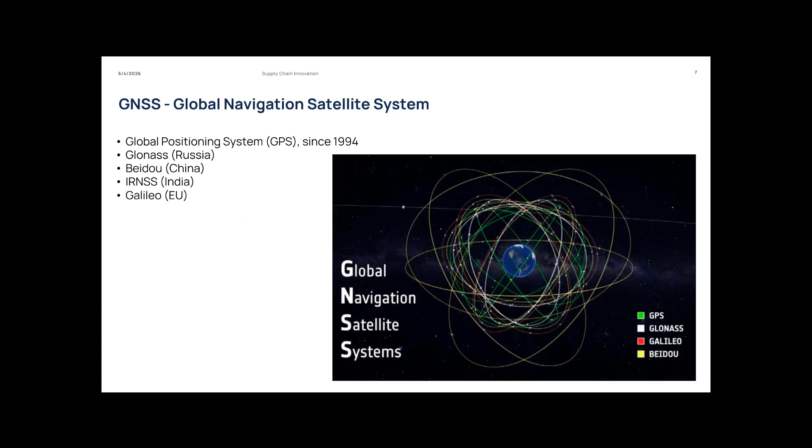So this means that out of all of these orbiting satellites, right now we need to get the signal of at least 4 of them. In a couple of slides we will see that we see many more, but that's the main minimum requirement for making GNSS work. So at least 4 satellites that are simultaneously visible from our side.

But the number of satellites in each constellation is much higher because we need to guarantee coverage all over the planet. The satellites that we see right now over Milan are different from the satellites that are visible right now over the United States or over China, because satellites are able to cover only a specific portion of the Earth at any time. And since the Earth and satellites are rotating, there is a continuous variation of which satellite is visible from which side of the Earth.

It seems easy, it's just a measure of when the signal arrives and when it was transmitted. In practice, there are a lot of issues. First of all is the propagation through the ionosphere and troposphere, which is not ideal at all, but that is related to wireless electromagnetic propagation, which is not in the scope of today. So we are not going into the details of the physics. You should have seen some of the principles of propagation in the physics courses in the first year of the bachelor, but that's not the point. It's just to mention that propagation in the atmosphere introduces possible errors.

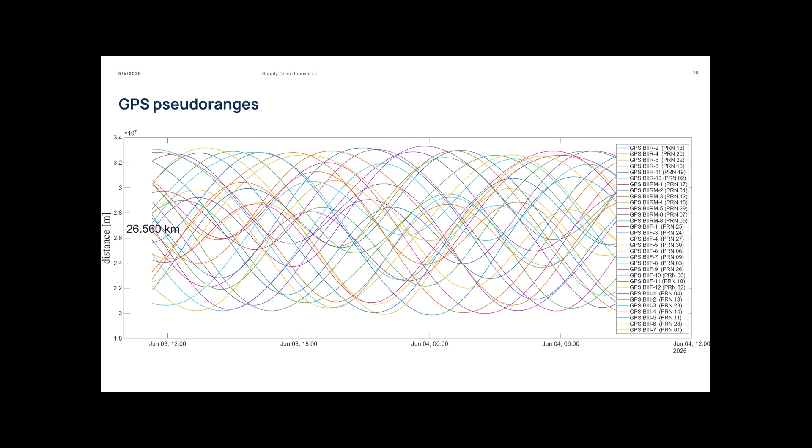Receiving at least 4 of these signals allows us to estimate the 3D position and basically see where we are on Google Maps or Apple Maps or whatever navigation app you are using. So the final use is actually very simple. We just see a circle or a pin on our smartphone, but that is the result of complex processing and wireless propagation phenomena that started 26,000 kilometers away from us.

If it is not range, it can be range difference. So it's no longer the distance, but the difference of distances. We have one distance as reference and another distance. So we take, for instance, sensor 1 as a reference, and we compute the difference with respect to sensors 2, 3, and 4. Now we do not have a circle anymore. We have a hyperbola, that's the geometrical interpretation of difference of distances. The user is located along this hyperbola, and intersecting the different hyperbolas provides the final user position.

The difference is that we need to use one reference. This means that if we have a sensor network of 4 sensors, we can only have 3 time difference measurements, while in the previous case, with 4 sensors, we have 4 time measurements. A drawback, but this difference of distances mathematically eliminates the clock difference between the device and the sensor. So it's a way to deal with inaccurate or non-perfectly synchronized devices. When the user device is not perfectly synchronized with the network, this type of measurement is used instead of the previous one.

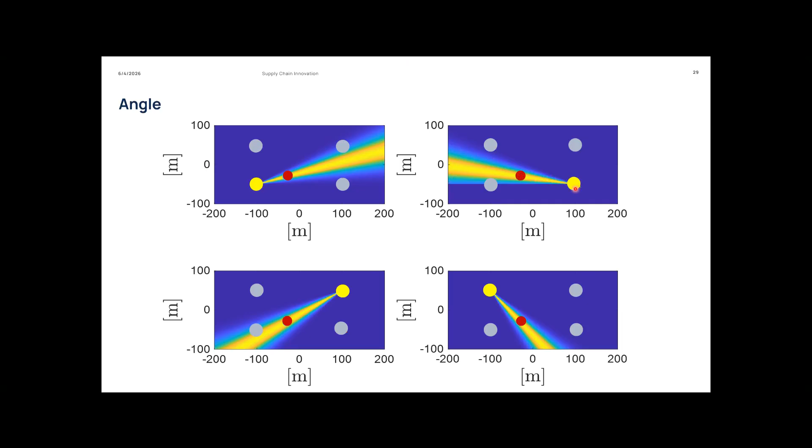Another type of measurement is the angle. So no longer a circle, but the angle is this cone of information with respect to each of these sensors. What is the property of this cone? It increases the uncertainty with increased distance. Look, for instance, here. The further we move away from this sensor, the greater the uncertainty. So the information is more accurate if the user is very close to the sensor. But overall, the process is always the same: measuring the angle from the four sensors of the infrastructure, intersecting, and getting the final estimate of our position.

The last type of measurement is instead power. Power is still producing circular-based information with respect to the sensor. The difference with respect to ranging is that in wireless propagation, power is logarithmically decreasing with the distance, so the accuracy of this information is worse than traditional ranging information. But still, the concept is measuring the power with multiple sensor infrastructure and then intersecting them to get the final position, even if the accuracy with power-only based methods is not always good at all.

So here we easily have tens of meters of error because we are not able to get an exact power measurement. And this is why typically power-based information is mainly used not for absolute X and Y positioning, but mainly for proximity positioning. Proximity means you assume or you tell that the device is in the area of one sensor rather than specifying exactly its coordinates.

So if this device is connected or is receiving the highest power from this sensor, it is said to be in its proximity and it is located in a specific coverage area. So if this sensor has, I don't know, an area of 100 meters, this device is in a circle of 100 meters, no matter where exactly it is. We know that it is connected with this, so it is, of course, in its coverage area of 100 meters.

Having seen the different technicalities or the different ways of positioning measurements, let's now see the evaluation. So imagine you have your network of sensors. How do we understand or how do we measure the quality or the accuracy, or how does it perform? The metrics are not only used for evaluation, but also for design. So choosing the trade-off of installation, how many sensors, where to install, how to connect, which measurements they provide, etc., is also a design choice.

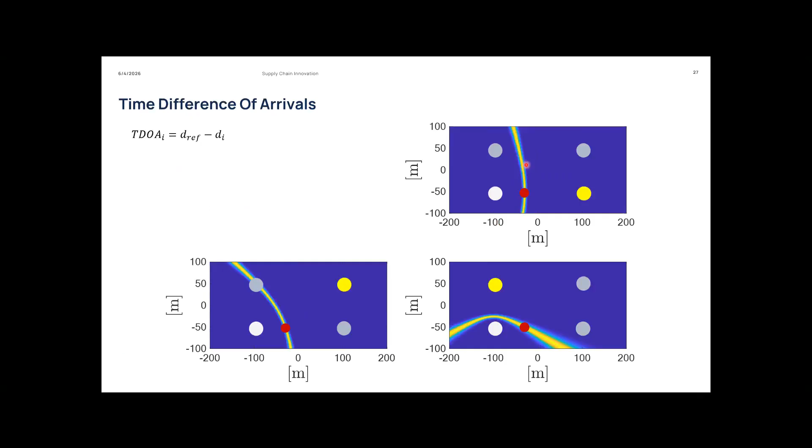So imagine this architecture here: the more devices you add, the more processing load is requested by this processing unit. And there is obviously a maximum tolerable number of devices such that you do not saturate the processing, or you provide a final position estimate in due time. In due time means within a specific maximum latency threshold.

Another metric is the accuracy: how close the estimate is to the real location. And precision: how much is the system able to replicate the same result in the same condition? Complexity: the degree of hardware, software, and operating factors of the full localization solution. The robustness: the constant system-level accuracy over time. The system must be able to continuously provide positioning estimates in a reliable and accurate way, even if the technology becomes outdated or the hardware is aging. The reliability: the percentage of valid positioning results.

We need to deal with energy efficiency. So understanding which are the best sensors, if they have to be connected with a wire to the electricity, or if we can use a battery. In the case of battery-based sensors, the energy consumption is strongly related to how many months or years the system can be deployed without intervention to replace the battery. And the trade-off between how often we provide measurements and how long we would like the battery to survive is the trade-off for battery-based systems.

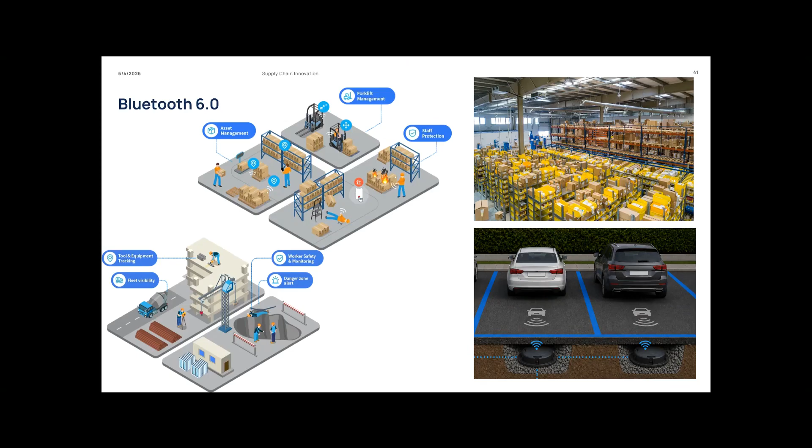Another technology is RFID, radio frequency identification, which can be an active or a passive technology. Passive technology is basically our credit card system. So you do not have a battery in the credit card, but you just have a passive electromagnetic intelligent chip on your card that is sending, reflecting information towards the reader, the shop. Or we can have active RFID systems like the one we use for paying the highway in Italy. And in that case, the devices have a battery.

Basically this type of technology acts with the sensor, so our infrastructure that sends a query signal. The RFID chip replies. So a query-receive mechanism. So in case of a credit card, this is our paying device at the shop, and the receiver is instead the credit card that prepares the signal. In case of the tolling system, it is a device on the tolling gate, and instead our Telepass equivalent solution.

This is a technology that is extremely accurate. This is an example of a test I did for different companies showing that overall we can have centimeter level of accuracy. But the drawback is that the devices that constitute the sensing infrastructure have a limited coverage, typically not going beyond 50 meters.

In some cases, if there is no obstacle in between, you can go up to hundreds, but in practical conditions it's 50 meters of coverage, so it's very limited coverage, which means a lot of installation. So in order to monitor an area, there is a lot of manual intervention and maintenance to do for installing and keeping the system operative. But overall, once you install the system, you get super accurate performance.

Even if we are in a complex industrial environment, where you see there are lots of metallic objects. As I said at the beginning, objects produce reflection, shadowing, and if they are metallic, they completely block the signal. So the industrial environment is the worst environment for positioning because of the metallic presence and machines.

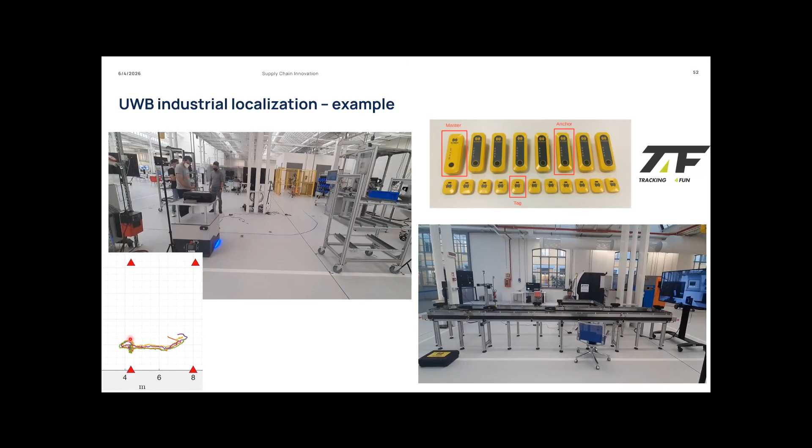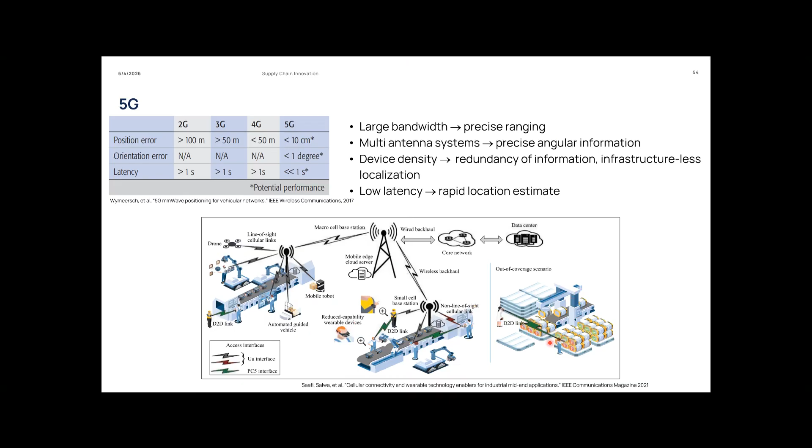So the concept of Wi-Fi is definitely equivalent to the 5G. Both of them are comparable, from an operational point of view, technologies for joint communication, which is the first primary use case, and positioning.

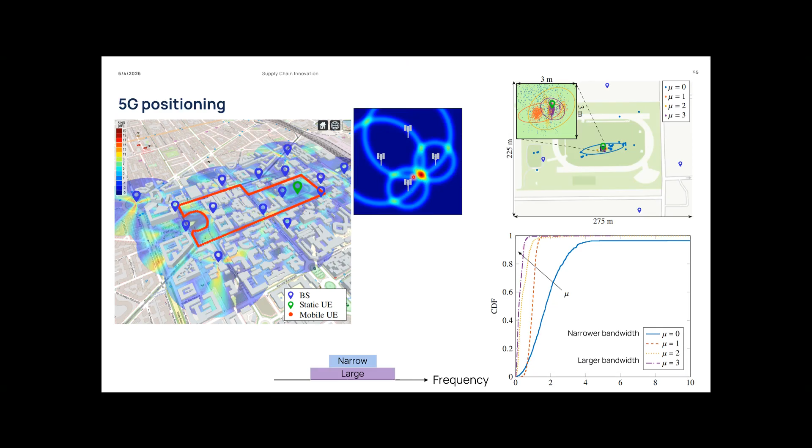And 5G also has implications in industry. So in a smart connected industry, you can have 5G connectivity and positioning service in different contexts, different applications, different use cases with different KPIs, but still all addressable. Healthcare, so in hospitals, the navigation of drones, in retail stores for in-store navigation, but also for personalized offers, etc.

So overall, you see that use cases are always the same. Use cases that can be addressed by RFID, Bluetooth, Wi-Fi are more or less the same, but they are addressed with different technologies. And this is exactly, I would say, one technology that fits all. So 5G can be a super competitor with respect to all the other technologies we have seen so far, because it can address all of the use cases, while also guaranteeing the same accuracies, at least theoretically.

The only difference is that the others are already mature, they are already commercially available. 5G is not yet commercially available, but it is expected to address the positioning concept, benefiting from what? Benefiting from almost worldwide coverage, because cellular connectivity is available almost everywhere, or it's going to be. And it's like repurposing it.

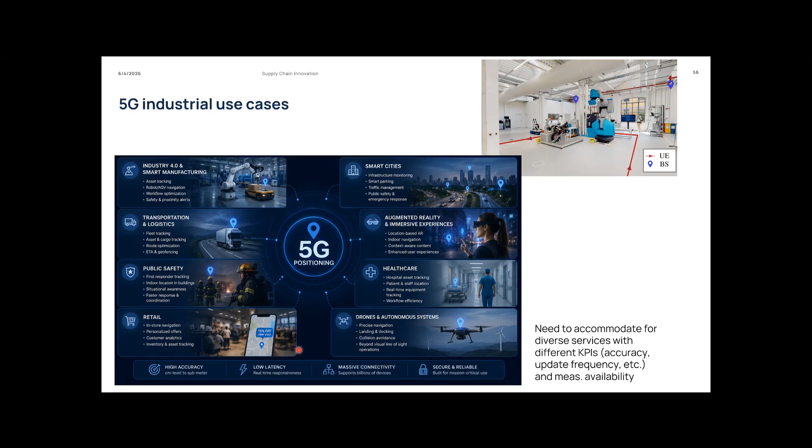So while Bluetooth sensor networks or ultra-wideband sensor networks require specific installation, 5G can exploit cellular operators' infrastructure that is already installed. Then, okay, if you need a specific 5G service inside your house, you have to install specific base stations there. But overall, at least for a consumer positioning service, everything comes in a passive way, just like GPS, more or less.

Let's now move completely to passive technology, which is radar, radio detection and ranging. It is a system that sends electromagnetic signals and listens to the echoes reflected back by the targets. Any object has a specific response to radio frequency impulses. Metallic objects have higher reflectivity, the human body has much lower reflectivity, but overall, objects reflect the signals. This is why we have multipath, it's exactly the same concept.

The difference is that here the copies of the received signals are measured by the same device that transmitted in the case of a monostatic system, while if the reflections are measured by another receiver, it's a bistatic system. But overall, the system measures this two-way signal reflection, from the transmitter to the object and from the object to the receiver, and estimates its location by measuring the distance and also the angle.

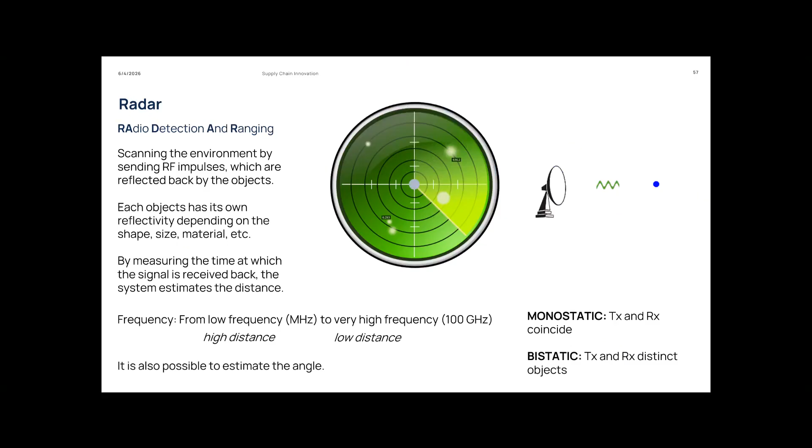A very similar technology is LiDAR, but the difference is it doesn't use radio frequency, but optical, so basically laser. So it's just a frequency shift, but the key technological problem is the same. So LiDAR and radar share the same physical concept. The only difference is that radar can somehow also penetrate objects while LiDAR cannot, because light doesn't pass through objects at all.

So the result is that we have a lot of obstructed areas. Look here, this is a LiDAR on this vehicle, and the vision that the vehicle has from all the reflections from the objects. But look what happens when the light arrives and bounces back from another vehicle. What's beyond the vehicle is completely obscured, so it is not possible to see this area at all, because the light cannot pass through the vehicle itself, but is reflected by the environment.

So even with this drawback, overall this system is super accurate. The accuracy is definitely, I would say, the best on the market, because a LiDAR system can have 1 centimeter of error, definitely unbeatable right now. Another solution in passive sensing is the camera.

Cameras shouldn't be intended only like red, green, and blue cameras like our smartphone, but there are different types of cameras. For instance, there is the thermal camera, which provides even richer information than traditional cameras. But no matter what the type of camera, the objective of the camera is to detect something. They are used for detecting objects.

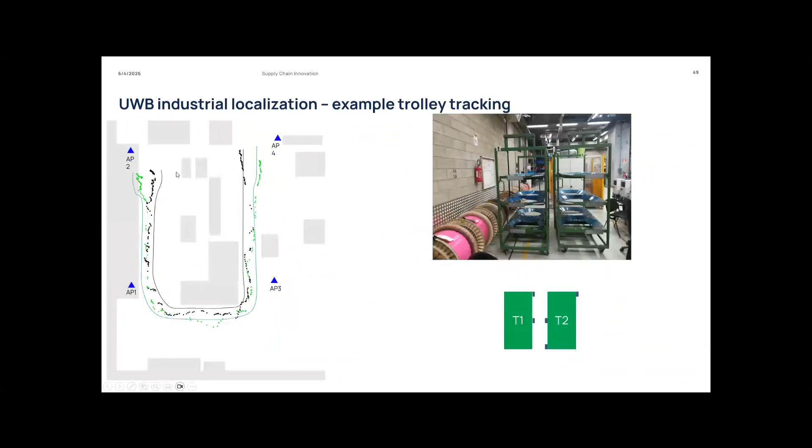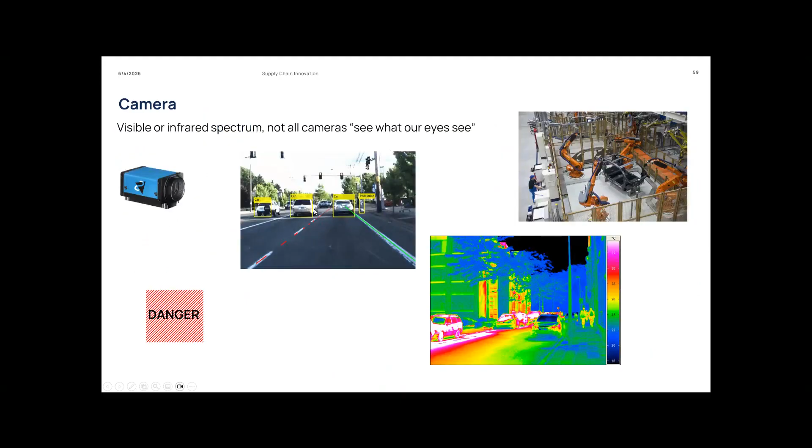Or on the other side, you can add information on the measurement. So this is the same industrial environment I showed you before, exactly this one. Here we have 4 access points, 4 anchors of the infrastructure. And this is exactly the top view of that same scenario. These gray areas are the machinery. So the 4 anchors, the machines, and this is the user.

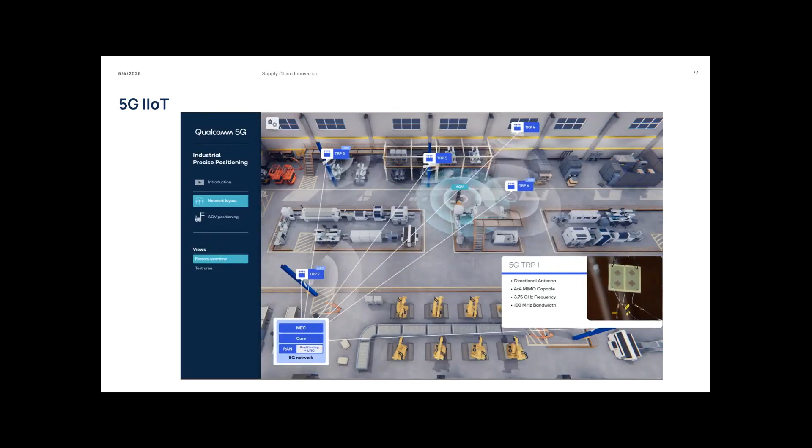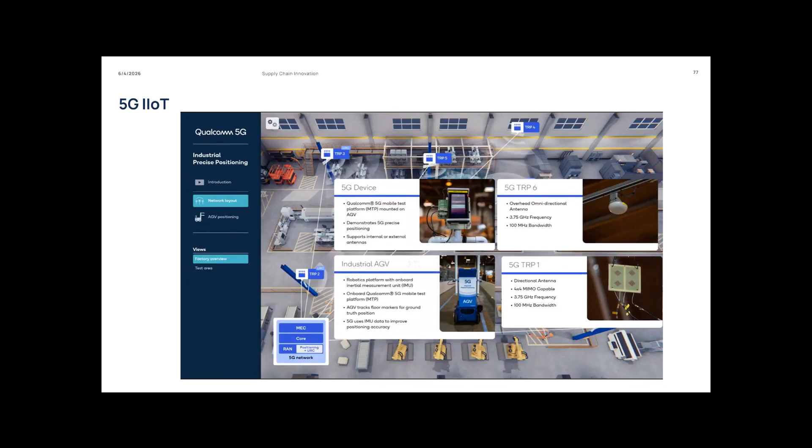Hi, I'm Balvinder Sachdev, Senior Staff Engineer at Qualcomm Technologies. I'm at our test bed for 5G industrial precise positioning located at our headquarters in San Diego, California. We at Qualcomm have been working hard to develop 5G as a foundation for Industry 4.0 with capabilities like precise positioning, which could help automated guided vehicles, or AGVs, navigate warehouses, factories, or retail stores of the future, monitor supply chains, track inventory, and enhance personnel safety, all to help industries attain higher operational efficiencies. In this demo, we're showcasing the 5G precise positioning use case with our over-the-air test bed and the AGV beside me, which has a 5G test device and an inertial measurement sensor on board to complement 5G positioning. Our 5G test bed uses 6 transmission reception points, or TRPs, operating in a deployment-friendly 100 MHz bandwidth in sub-7 GHz frequencies. The sounding reference signal, or SRS, transmitted by the AGV's 5G device is received by multiple TRPs.

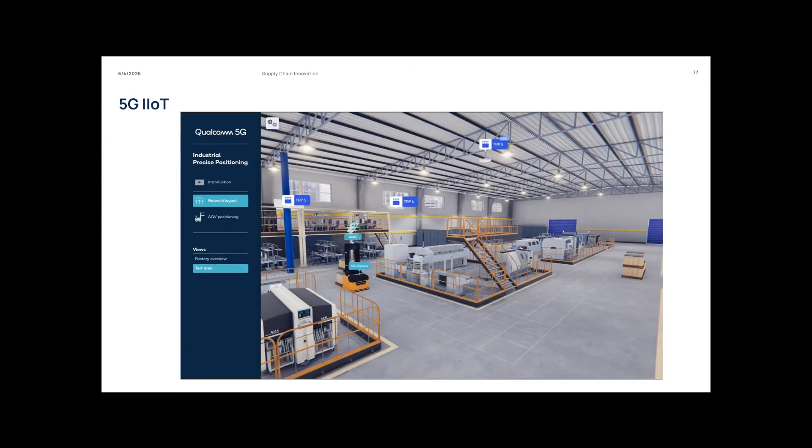The AGV's position is triangulated using the uplink time difference of arrival technique, or uplink TDOA. And positioning precision can be enhanced with inertial measurements from the onboard sensor. Looking at the key performance indicators now, we have an absolute accuracy plot that indicates real-time 2D positioning error in centimeters. Below that, we see the signal-to-noise ratio in dB of the SRS from the 5G device received by all TRPs.

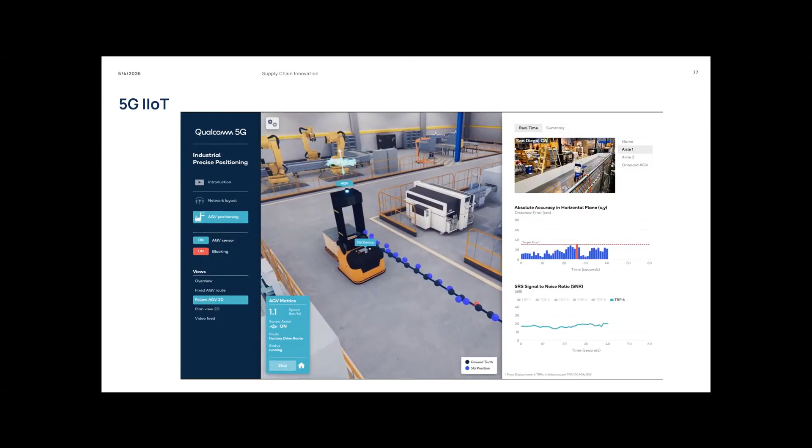As the AGV moves along the route, it provides reliable, accurate, and periodic ground truth positioning, shown with black dots, which is then compared with the 5G position estimate in real time using uplink TDOA technique, shown by blue dots, to compute positioning accuracy. Uplink TDOA is a network-based UE-assisted positioning technique where the UE transmits a reference signal and the network measures the difference in time of arrival of the SRS at different TRPs relative to a reference TRP.

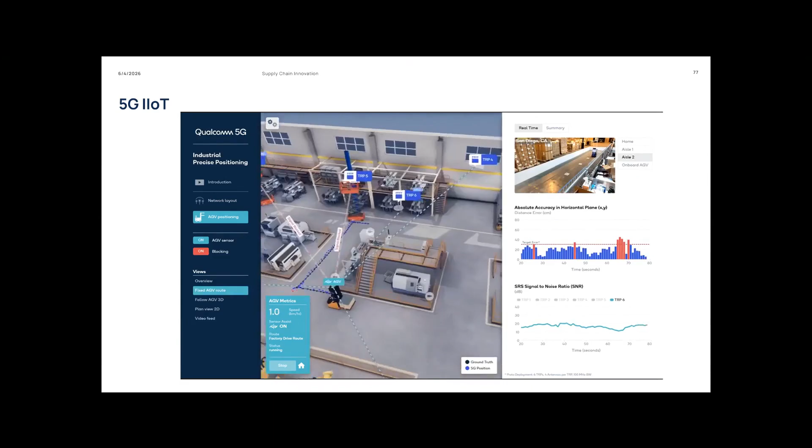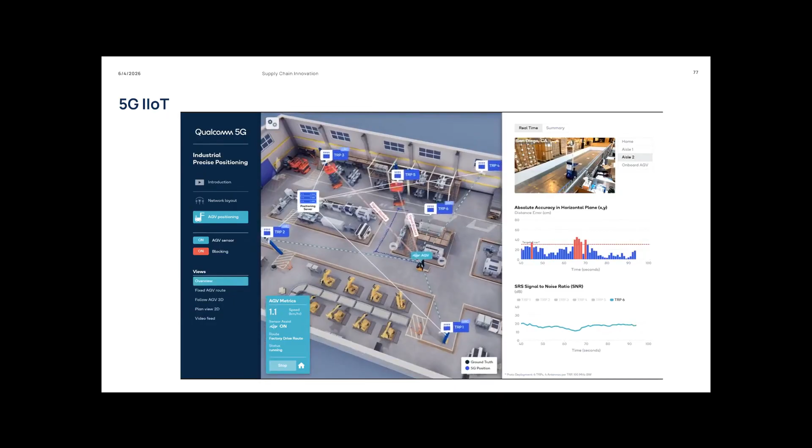In both downlink and uplink TDOA, the TRPs need to be synchronized, but the key benefit of TDOA is that tight synchronization between network and the 5G test device is not required. As you can see, we are able to demonstrate centimeter level accuracy in this demo. We are also studying indoor precise positioning in challenging industrial environments.

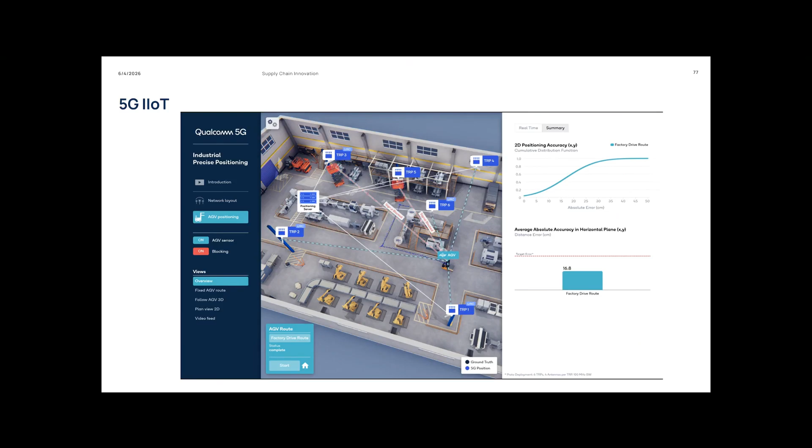In summary, we've used a deployment-friendly 100 MHz 5G carrier over the air in sub-6 GHz frequencies for uplink TDOA positioning. We complement that with an inertial sensor for centimeter level precision as a proof of concept for 5G industrial precise positioning.

So, maybe most of the technical names are familiar, but it's not the point. The point is to give you the idea of 5G positioning. In this case, it was integrated with the inertial sensor, but that's not the point. The point is that they show how it is possible to have an AGV,

or an automated guided vehicle, which transmits signals. Then there are base stations of sensors at the infrastructure side that receive and estimate the position and provide the output back to the AGV, so that the AGV knows where it is and can navigate autonomously. A similar example is now with our video, which is more focused on IIoT, so more on production process.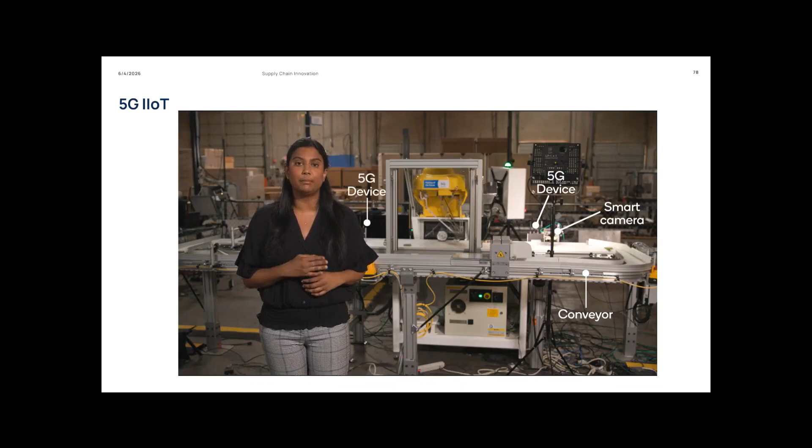The conveyor belt behind me brings objects, black and green pucks, into the field of view of a smart camera, which uses onboard AI to classify them. A 5G device wirelessly connects the smart camera to a gNodeB over the 5G air interface or to another 5G device over a 5G sidelink interface. Object detection triggers from the smart camera are received by the second 5G device connected to the PLC that controls the industrial robot and the gates.

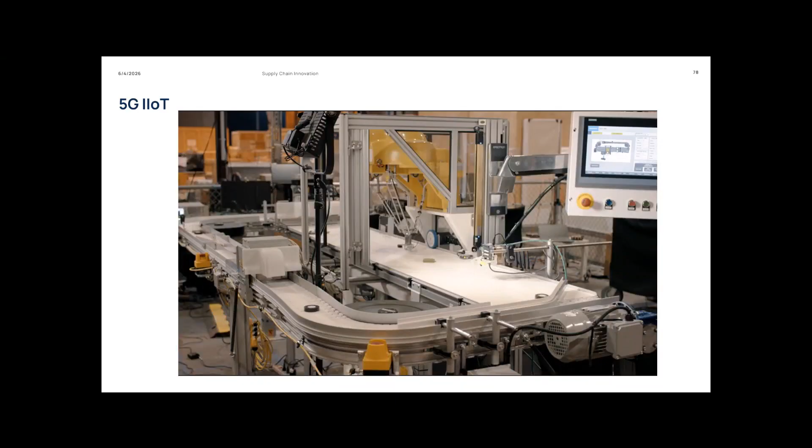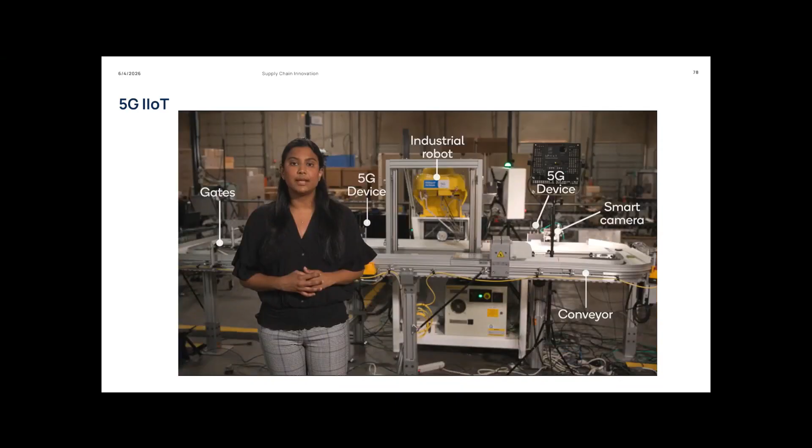The robot must receive control signals from the PLC at the right time to correctly pick and sort the pucks by type, so synchronization is critical. The PLC also controls the gates, which must open at the right time for the pucks to move along the conveyor uninterrupted. 5G supports time-sensitive networking, or TSN, transparently across the network. TSN is used to synchronize the controller with the various sensors and actuators, such as the camera, the robot, and the gates.

In addition to TSN, another key requirement is ultra-reliability, which 5G delivers with coordinated multi-point transmissions, or CoMP, using multiple transmission and reception points, or TRPs. This will allow more robust transmissions in challenging radio environments. Finally, 5G sidelink enables direct communication between the smart camera and the PLC with just one hop. Now, let's look at the demo's dashboard.

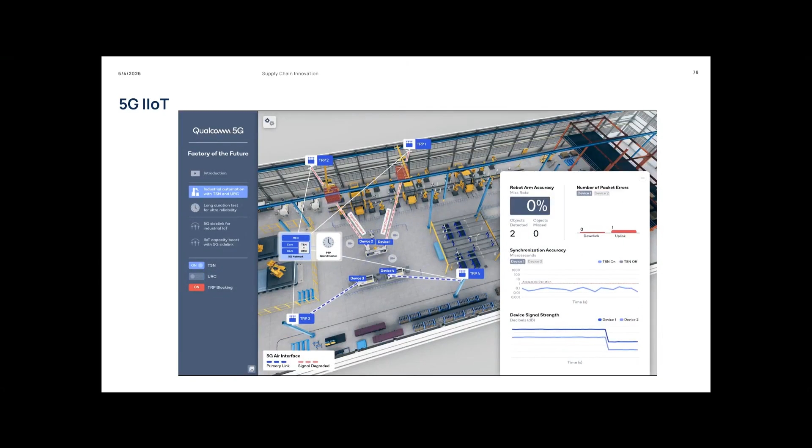Since TSN and ultra-reliable communications, or URC, are switched on, we see 0 packet errors and sub-microsecond time synchronization, despite 2 of the 4 TRPs being blocked. When we turn URC off, we see the signal strength dropping since 2 of the TRPs are blocked. The number of packet errors increases due to signal degradation.

When we turn URC back on and TSN off, we see the signal strength recover and the packet errors return to 0. But time synchronization is now much poorer than 1 microsecond, which degrades robotic arm accuracy, and many pucks are being missed, as shown by the red beacons around them.

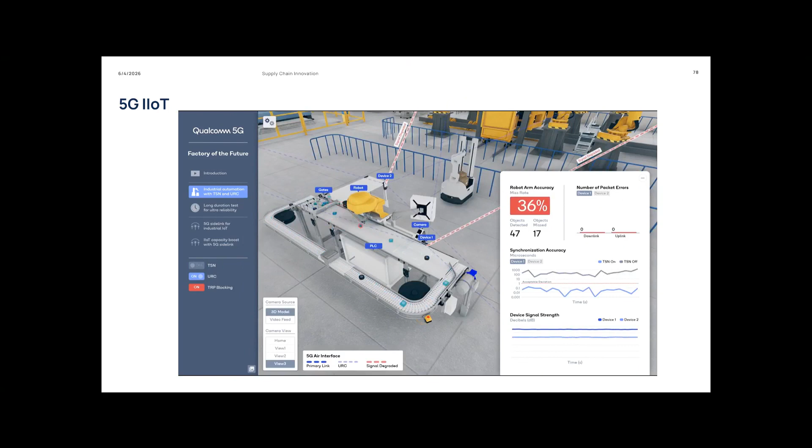Over a 24-hour period, we only achieved 3 nines, or 99.9% reliability with URC off. With URC on, reliability increases significantly to 6 nines, or 99.9999%, giving industry the robustness needed to go wireless with 5G.

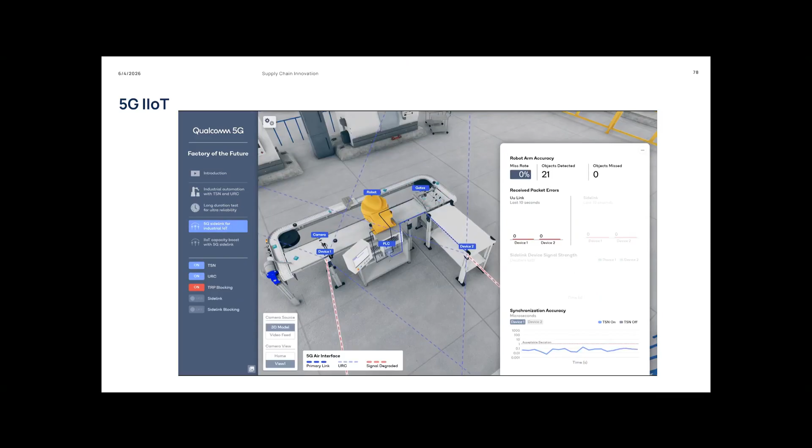The new 5G sidelink between the 5G devices has been off all along. From a different angle, we can visualize the activated 5G sidelink for direct device-to-device communications. If the sidelink gets blocked, the packet errors for the 5G sidelink increase, but the 5G air interface to the gNodeB has no packet errors due to URC and can be used as fallback.

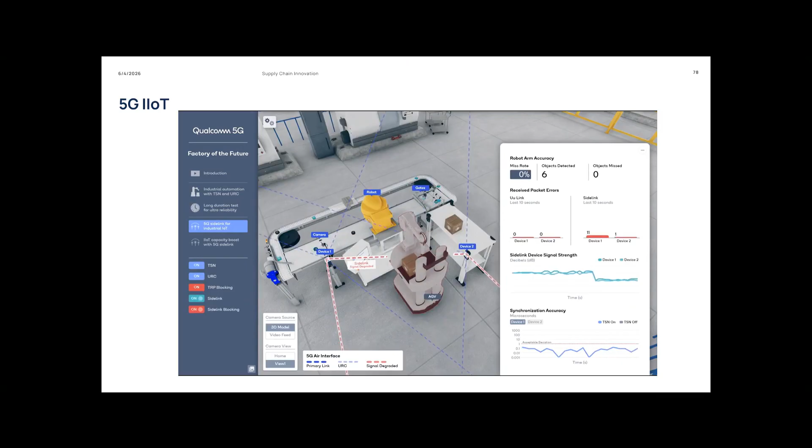5G sidelinks can boost industrial IoT capacity significantly by using precious spectrum resources more efficiently. In this 3GPP standard compliant network simulation, a factory floor has 18 5G gNodeBs, each with 2 TRPs, covering numerous 5G IIoT devices. By default, when 5G sidelink is off, 2-hop transmissions must be used between 5G IoT devices.

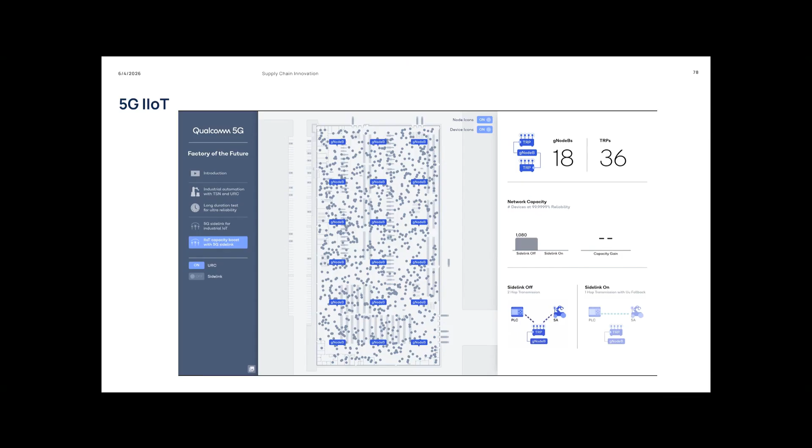The network has enough capacity to support 1080 IIoT devices with 6 nines or 99.9999% reliability. With sidelink on, 5G IoT devices can use 1-hop direct transmissions between them. 2-hop transmissions are needed only if a sidelink transmission fails due to a blockage, for example. The simulation shows 5G sidelink to drastically increase the devices supported from 1080 to 1980 with 6 nines reliability, a

capacity gain of 1.8x. In summary, we have demonstrated key 5G capabilities over the air like advanced ultra reliability with coordinated multi-point transmissions, time-sensitive networking with microsecond level synchronization, and direct communications with 5G sidelink for boosting industrial IoT capacity in the 5G factory of the future, which is why we believe 5G sets the foundation for Industry 4.0.